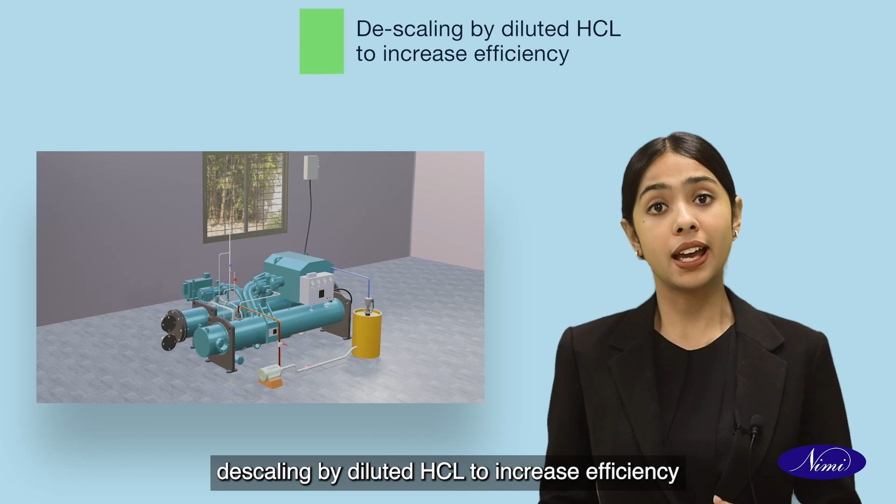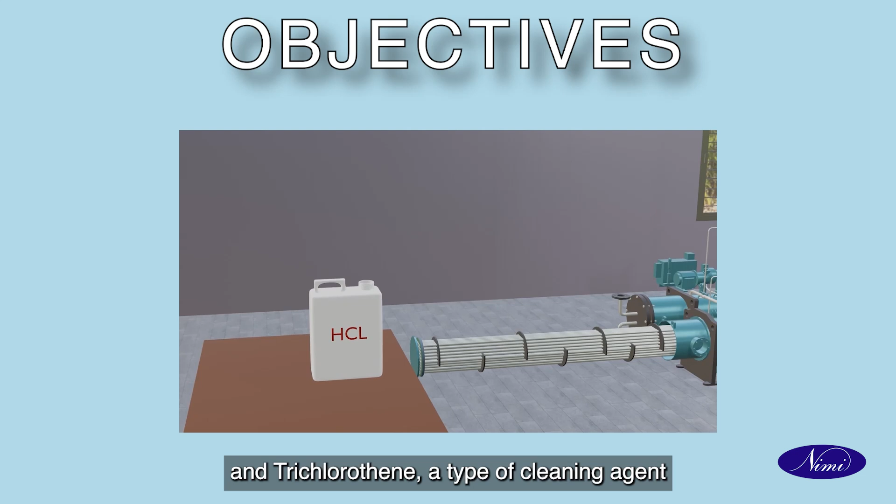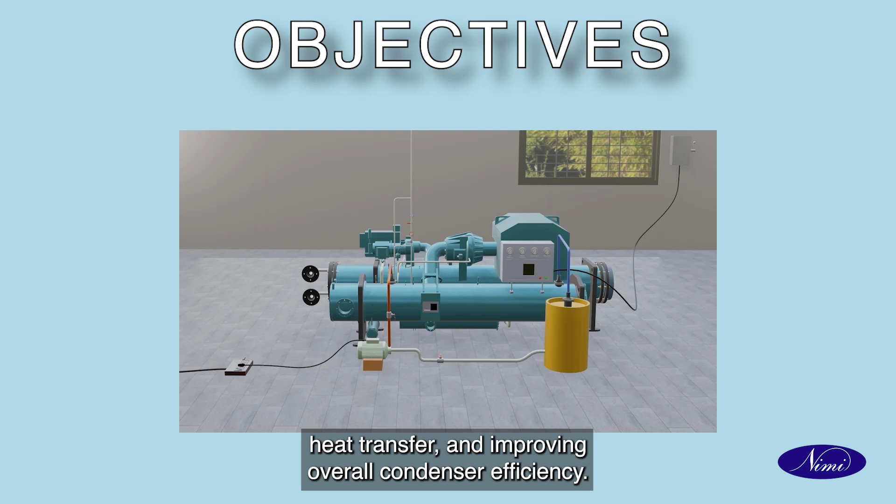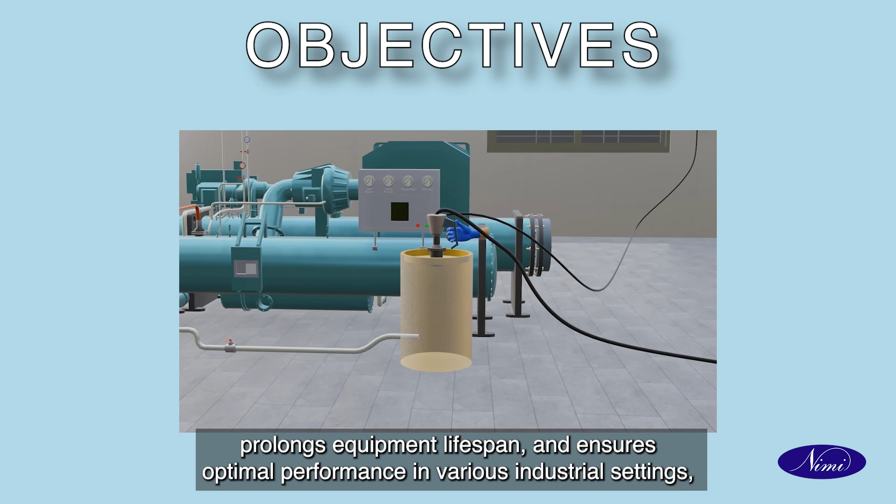Objectives: the objectives of descaling a condenser with diluted hydrochloric acid and trichloroethylene, a cleaning agent now being phased out due to ozone depletion, are multifaceted. The process aims to remove mineral scale deposits, restoring unhindered heat transfer and improving overall condenser efficiency. By mitigating scaling issues, it enhances energy efficiency, prolongs equipment lifespan, and ensures optimal performance in various industrial settings, contributing to more reliable and cost-effective operation.

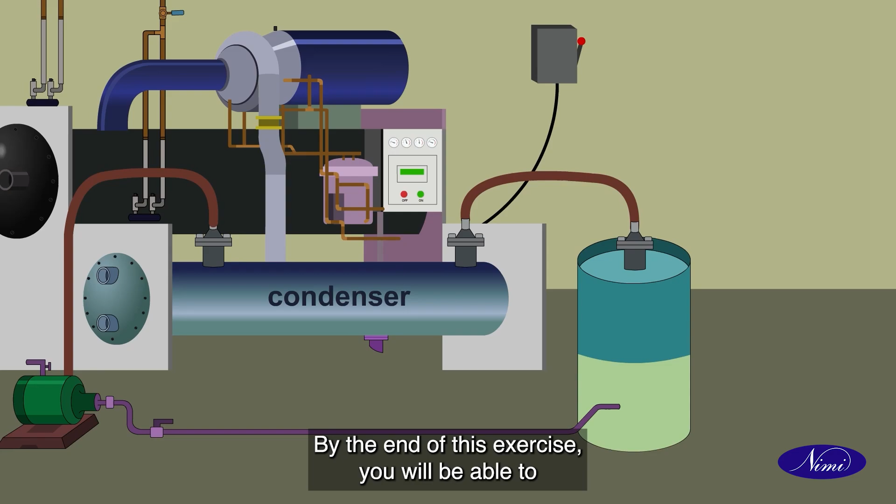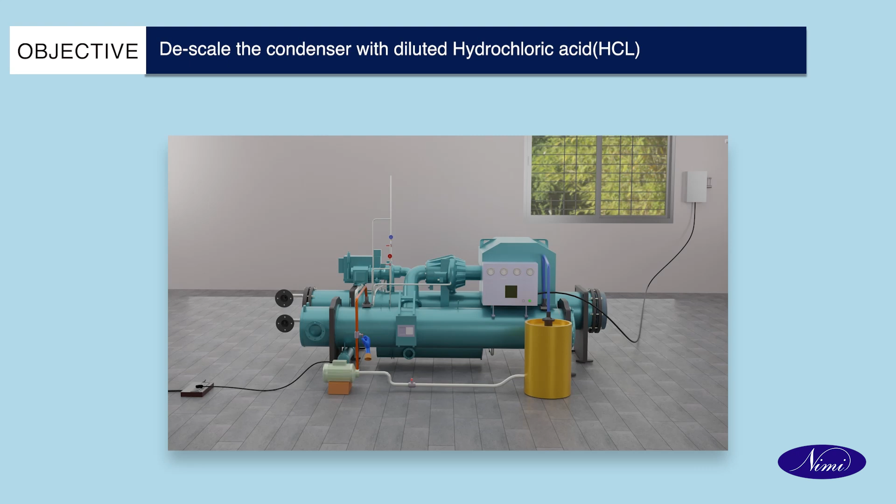By the end of this exercise, you will be able to identify the condenser connection joints, prepare the descaling solution, descale the condenser with diluted HCl, and follow the safety measures while performing descaling.

The descaling process with diluted hydrochloric acid requires a specific set of tools, equipment, and consumables. Essential items include acid-resistant gloves and goggles for safety, acid-resistant brushes for application, and pH testing equipment to monitor acidity levels. Now let us take a look at the tools, equipment, and consumables.

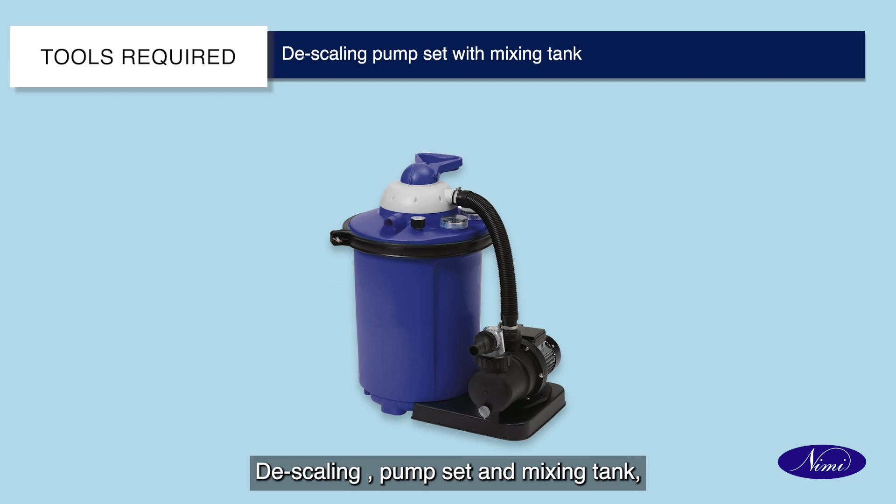Double end spanner set 6 mm to 27 mm, screwdriver 12 inches, cutting plier, center punch, shell and tube condenser, descaling pump set and mixing tank, flexible hoses, hose clamps as required, litmus paper 0 to 14 pH, hydrochloric acid as required, gasket and hollow punch set, adjustable wrench, pipe wrench set, steel bucket number 1.

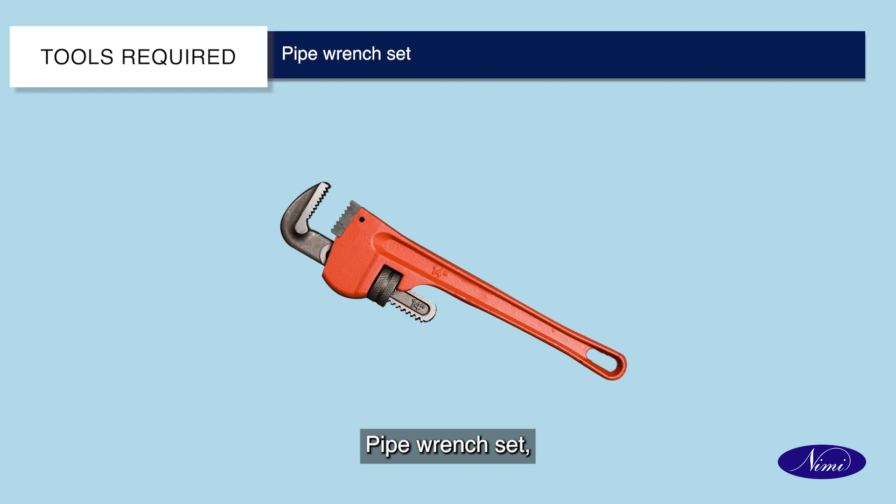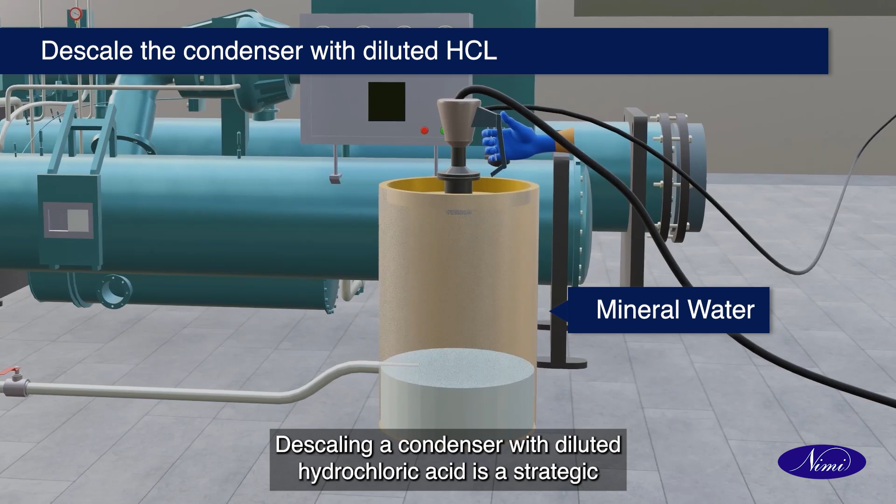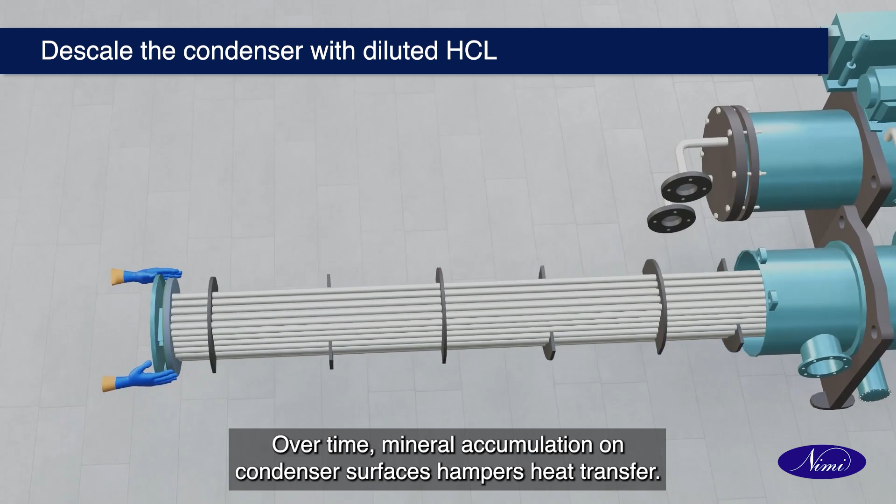Now let us see the preparations needed for descaling by diluted HCl to increase efficiency. Descaling a condenser with diluted hydrochloric acid is a strategic method aimed at boosting efficiency by mitigating scale deposits. Over time, mineral accumulation on condenser surfaces hampers heat transfer, diminishing performance. The use of carefully diluted HCl facilitates the removal of these deposits, restoring optimal heat exchange functionality and consequently enhancing the efficiency of the condenser in various industrial applications.

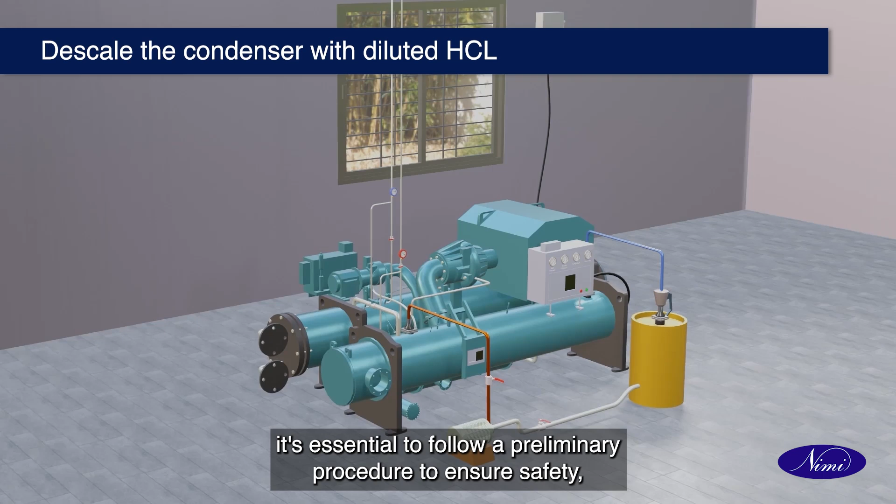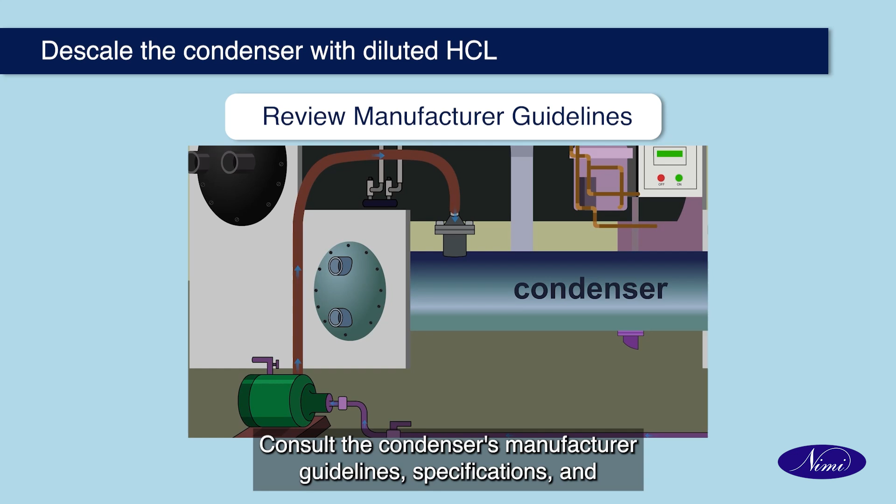Descale the condenser with diluted HCl. Before descaling a condenser with diluted hydrochloric acid, it's essential to follow a preliminary procedure to ensure safety, proper planning, and effective execution. Here's a step-by-step procedure to be followed. Review manufacturer guidelines: consult the condenser's manufacturer guidelines, specifications, and maintenance manual to determine if descaling with HCl is recommended and safe for the specific condenser model. Follow any specific instructions or precautions provided by the manufacturer.

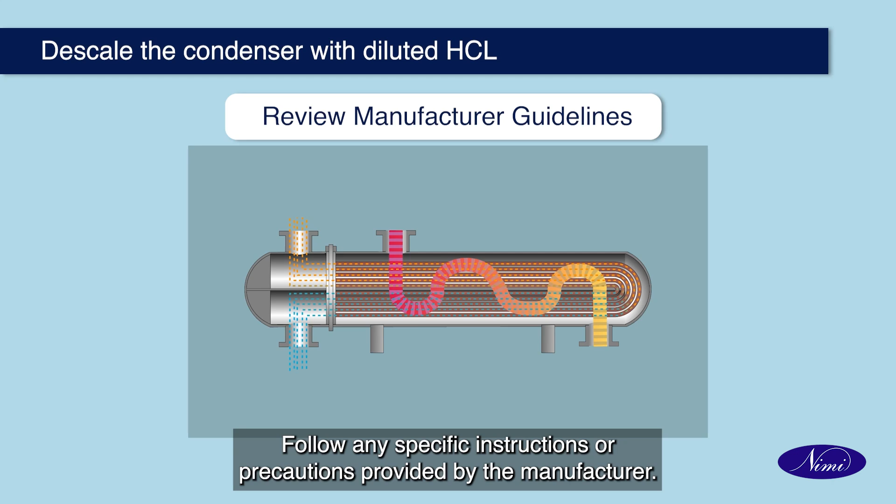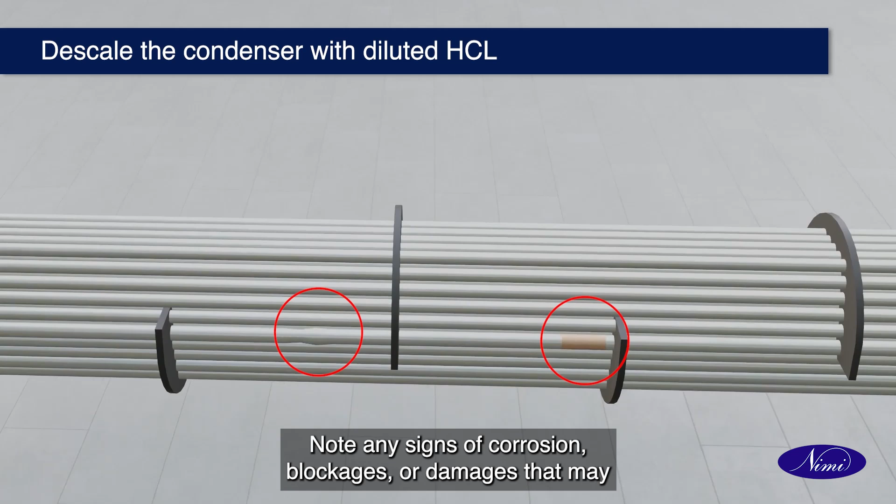Assess condition of the condenser: inspect the condenser visually to assess the extent of scale buildup or fouling. Note any signs of corrosion, blockages, or damages that may affect the descaling process. Identify materials compatibility: ensure the materials used in the construction of the condenser are compatible with hydrochloric acid. Some materials, such as certain types of aluminum alloys or rubber gaskets, may react negatively to acid exposure.

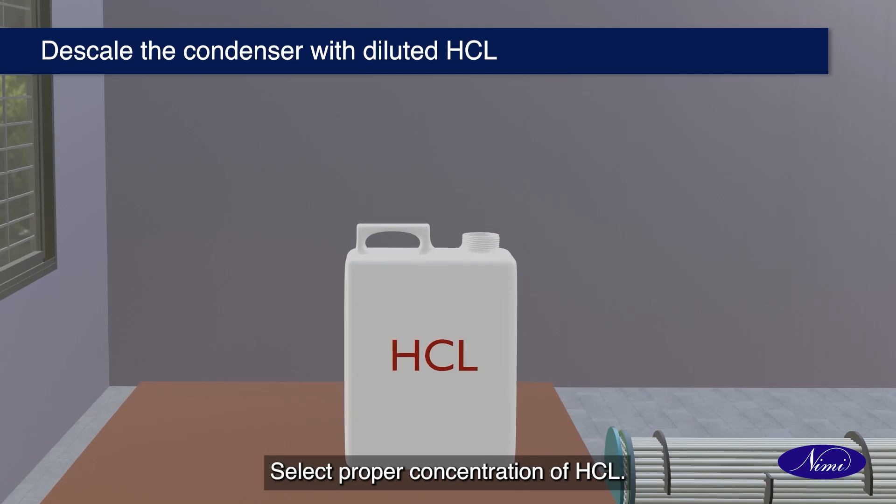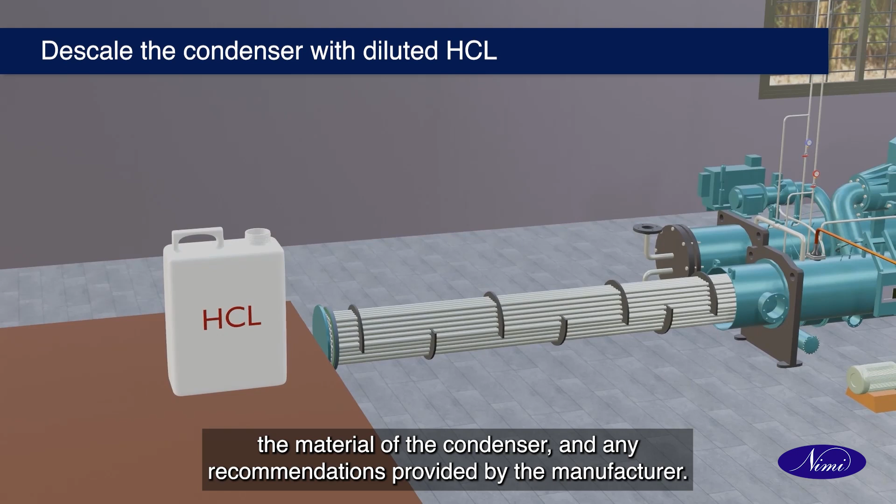Select proper concentration of HCl: determine the appropriate concentration of hydrochloric acid solution for descaling based on the severity of scale buildup, the material of the condenser, and any recommendations provided by the manufacturer. Typically, concentrations ranging from 5% to 10% are used for descaling purposes.

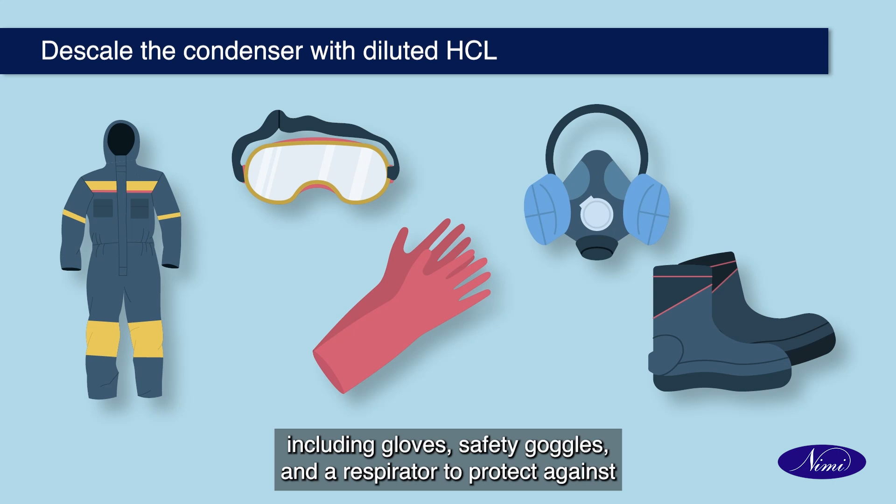Prepare safety equipment: gather and wear appropriate personal protective equipment, including gloves, safety goggles, and a respirator to protect against chemical splashes and fumes. Ensure that emergency eye wash and shower facilities are accessible nearby.

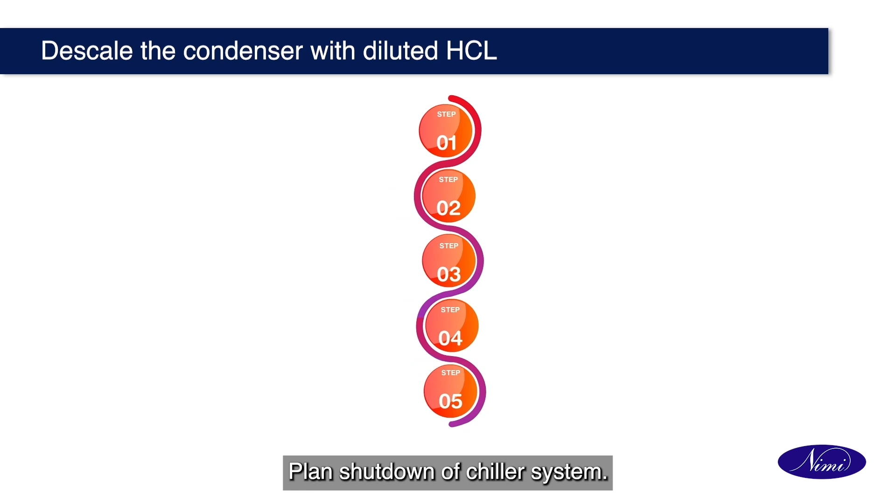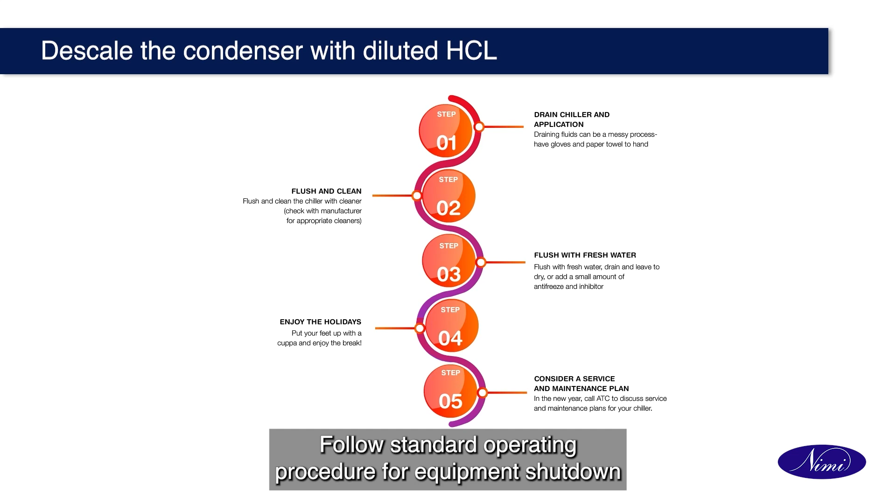Plan shutdown of chiller system: safely shut down the chiller system and isolate the condenser from the rest of the system to prevent water flow during descaling. Follow standard operating procedure for equipment shutdown to avoid damage or safety hazards.

Prepare work area: clear the area around the condenser and ensure that it is clean and free from any obstructions. Place absorbent material or spill containment devices under the condenser to catch any spills or drips during the descaling process.

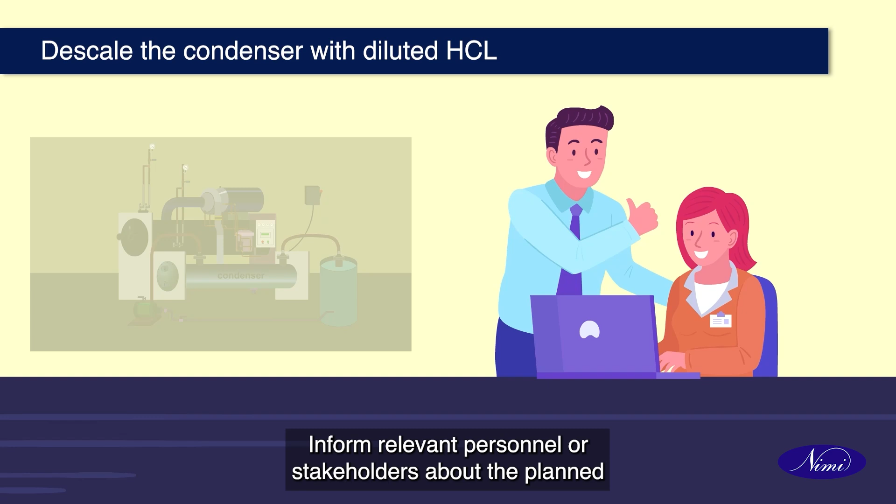Notify personnel: inform relevant personnel or stakeholders about the planned descaling procedure, including maintenance staff, facility managers, and any other individuals who may be affected or involved in the process.

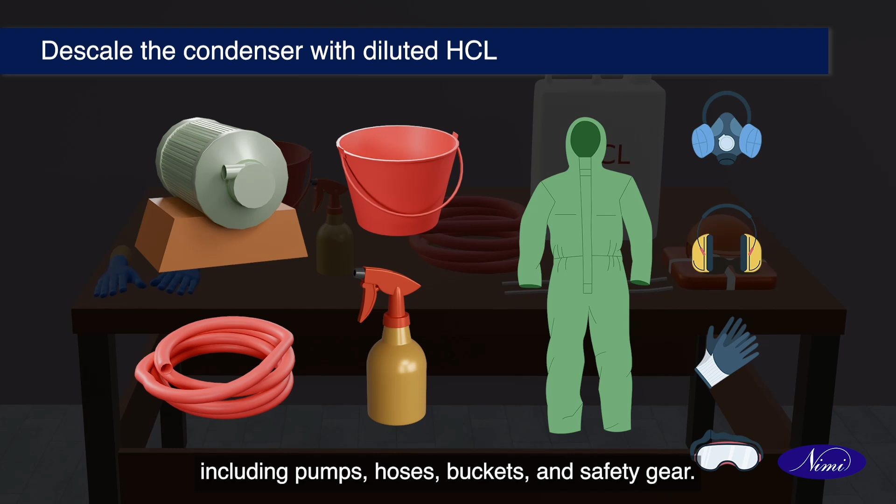Prepare equipment and tools: gather all necessary equipment and tools required for descaling, including pumps, hoses, buckets, and safety gear. Ensure that all equipment is in good working condition and readily accessible.

Procedure for descaling: connect the acid circulating system to the condenser. Fill the mixing tank with clean water up to 3/4 level. Connect the acid circulating pump motor to the power supply. Open pump suction and delivery and vent valves. Start the pump and keep filling the mixing tank to maintain half level till the water returns back to the tank through the vent line.

Stop clean water filling. Calculate roughly the water hold-up quantity in the system. Add commercial grade hydrochloric acid to the mixing tank in the required quantity to maintain a 5% solution of water and acid in the mixing tank.

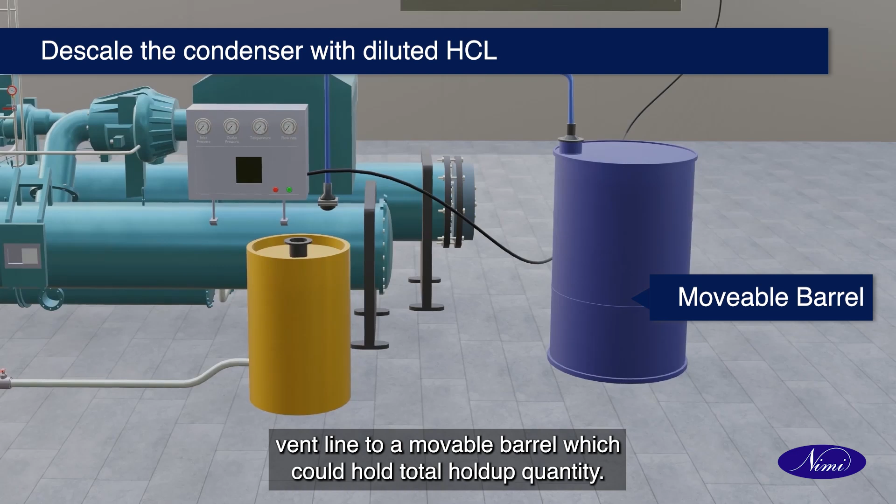Circulate for 4 hours. After completion of 4 hours, connect the vent line to a movable barrel which could hold the total hold-up quantity. Drain the system quantity to the barrel by operating the pump.

Fill the mixing tank with fresh water and circulate. Check the pH value of the vented water till it rises to 7 to 7.5; water is to be added if it reaches a lower pH value. Stop the circulation.

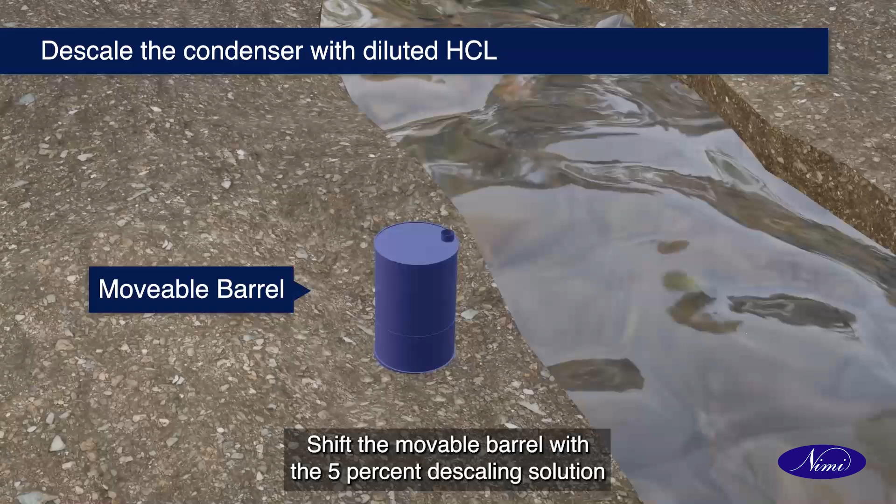Drain the mixing tank and hold the water to an area outside the building. Shift the movable barrel with the 5% descaling solution to a safe place outside. Pour it out and pour fresh water.

Disconnect the descaling system. Maintain safety measures.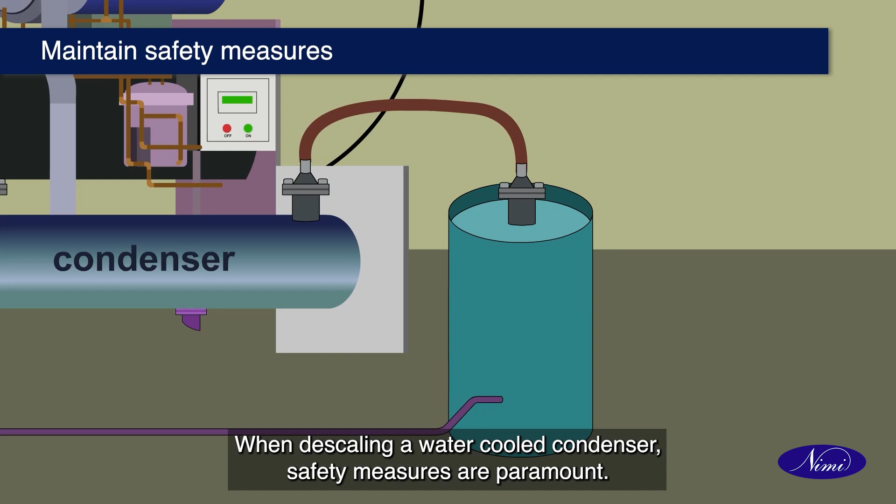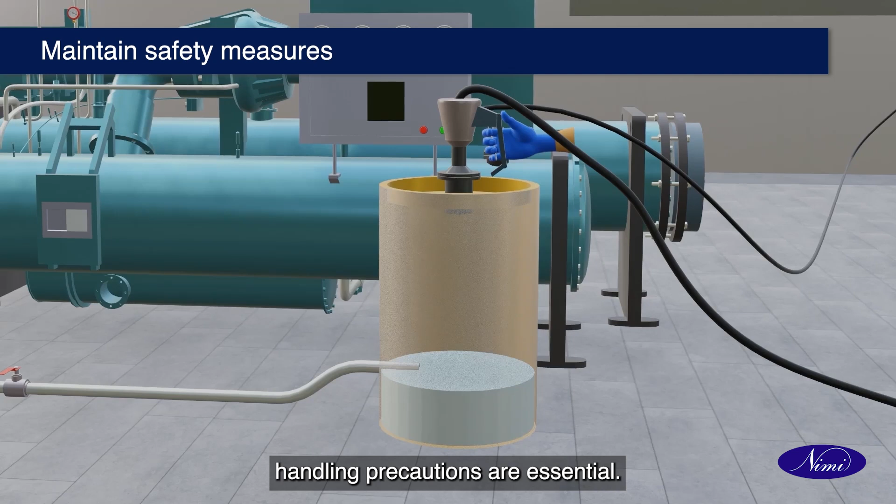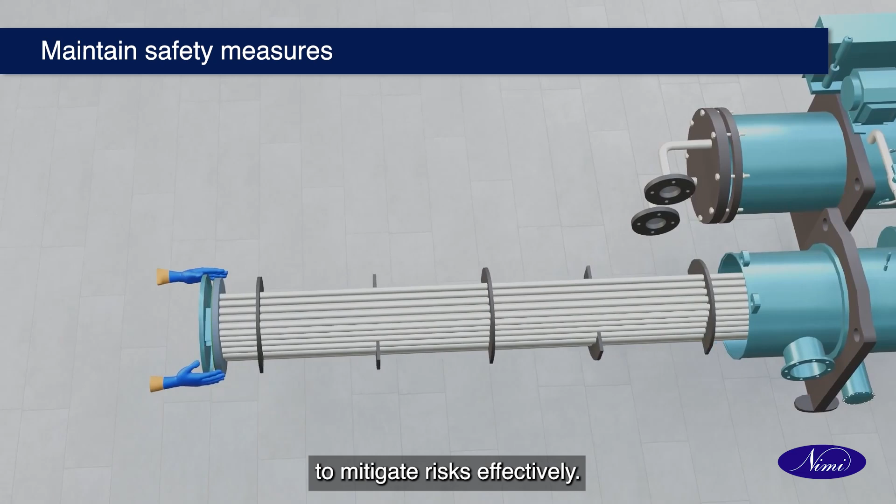When descaling a water-cooled condenser, safety measures are paramount. Personal protective equipment, including gloves, goggles, and a respirator, must be worn, while adequate ventilation and chemical handling precautions are essential. Proper dilution of descaling chemicals, isolation and shutdown of the chiller system, and vigilant monitoring throughout the process are crucial to mitigate risks effectively. Here are the safety measures to be followed during the descaling process.

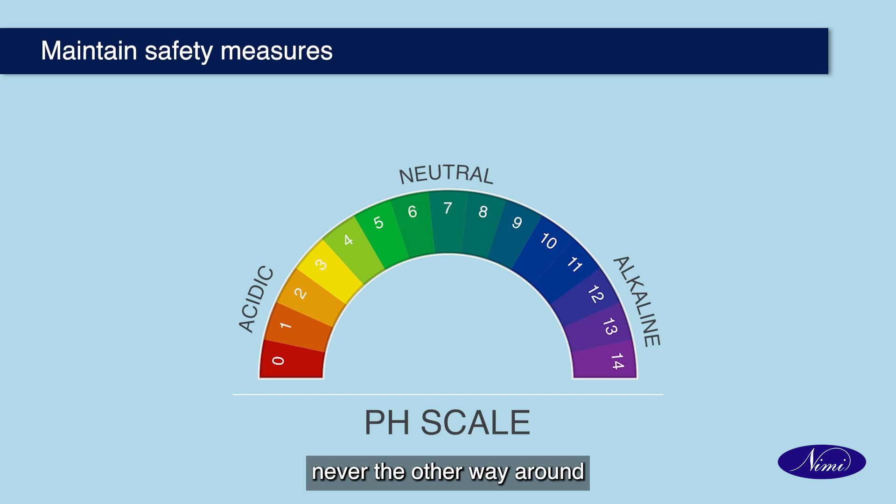Remember the cardinal rule: add acid to water slowly, never the other way around, to prevent hazardous reactions. Ensure eye protection by wearing goggles as a safety precaution. Protect your hands by wearing gloves as a safety measure. Confirm that all connections are securely tightened to prevent leaks.

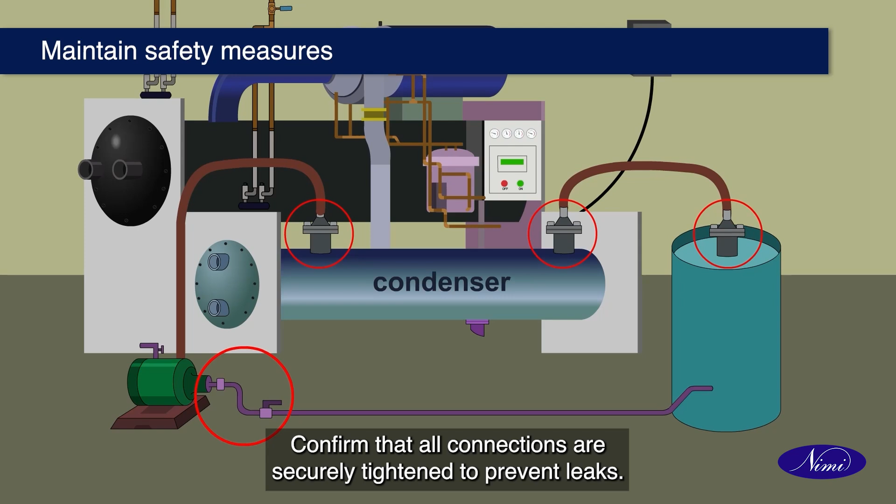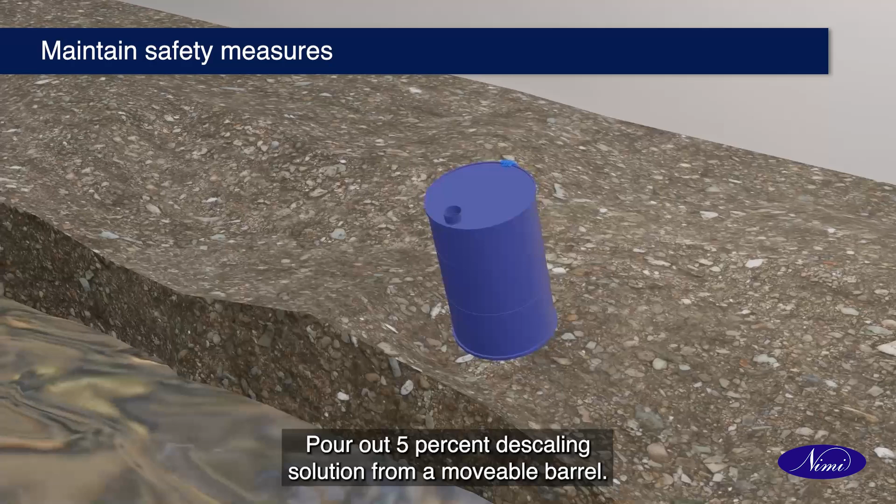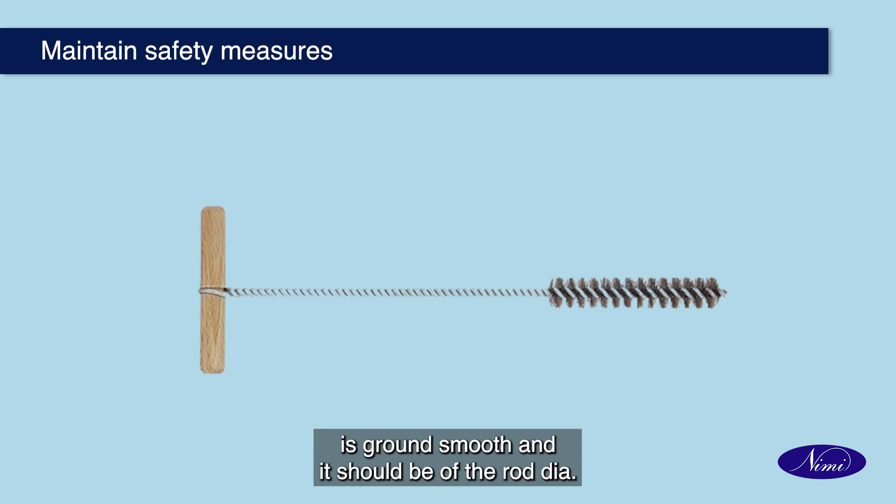Ensure the acid descaling system tank is not allowed to overflow. Prevent spills by monitoring the tank's level closely. Pour out the 5% descaling solution from a movable barrel to an isolated place or into a large canal of flowing water. Ensure that the welding joint from brush to rod is ground smooth and matches the rod diameter.

Descaling a condenser with diluted hydrochloric acid is a targeted approach to enhance efficiency. By removing mineral scale deposits, the process restores optimal heat transfer, addressing performance issues. The use of acid-resistant tools and safety equipment ensures a controlled and safe descaling operation, contributing to prolonged equipment lifespan and improved energy efficiency in industrial applications.

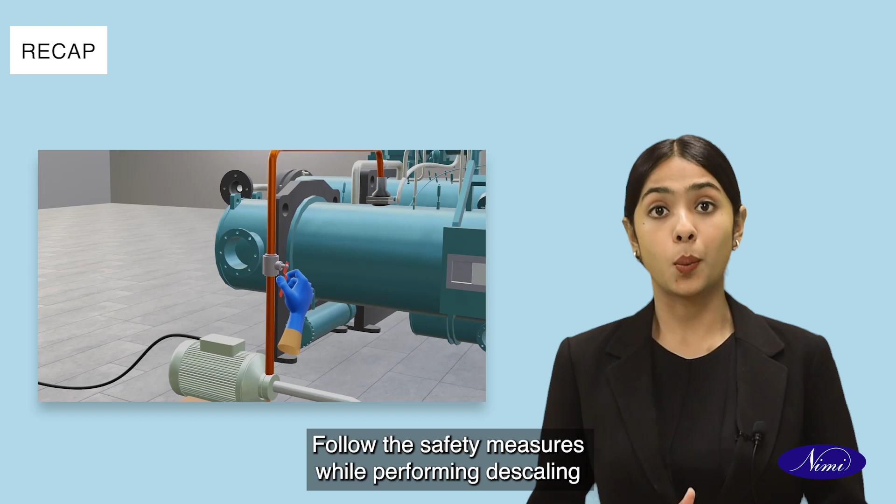In this topic, we came to know about how to identify the condenser connection joints, prepare the descaling solution, descale the condenser with diluted hydrochloric acid HCl, and follow the safety measures while performing descaling.